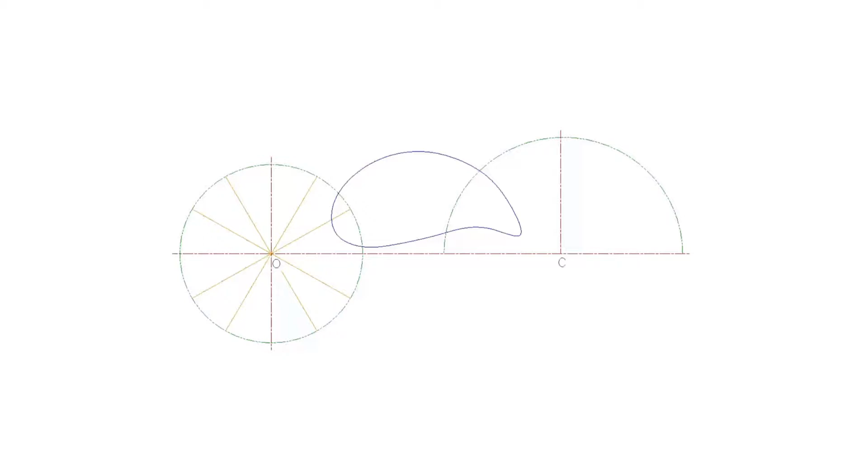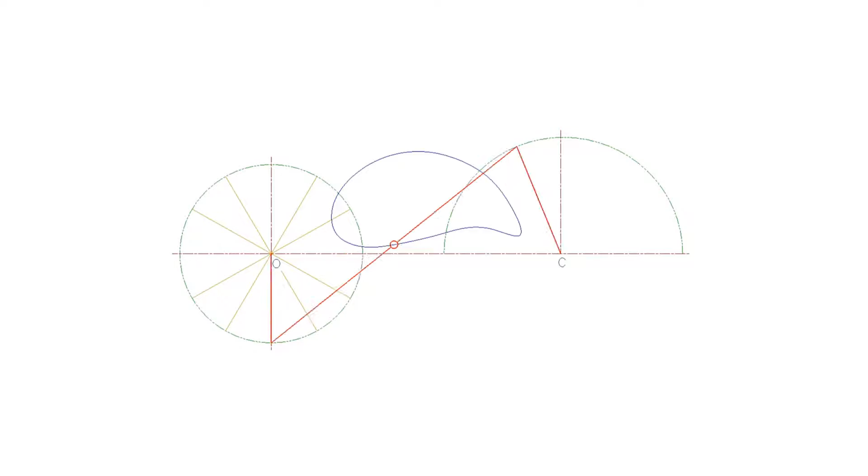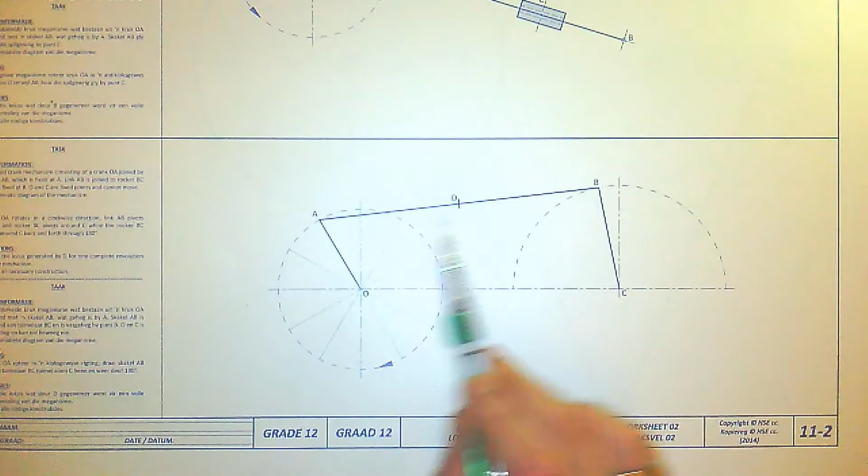For today's exercise, we're looking at a mechanism where we have 3 line segments. You can clearly see here the line segment O, which is also the center of the imaginary circle, and A, so that is the crank arm that's going to pull AB around. In the middle of AB we have point D, which is the loci that we have to determine. Then here we have point C, which is going to be the center for line segment CB, so CB is going to oscillate around point C as the center.

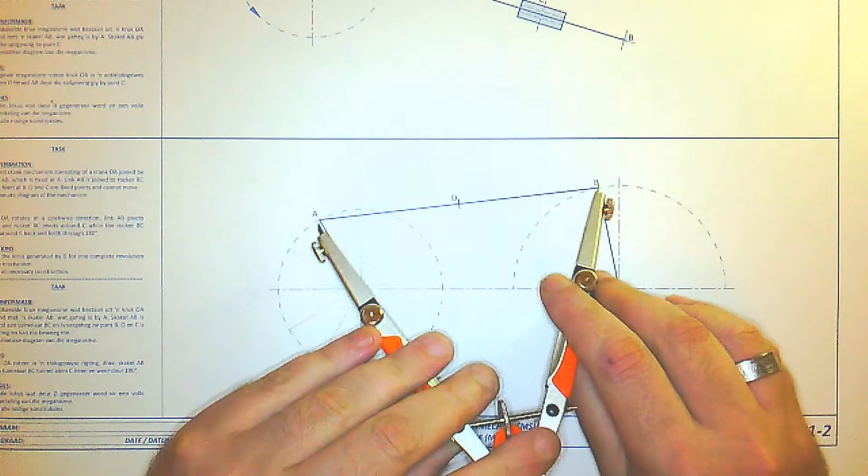It's actually a fairly easy mechanism to do. So to start, all we want to do is take our compass beforehand and set it to AB, because that arm cannot change its length. At the same time I'm also going to take line DB and set my compass at that distance as well. Of course you can measure it, but compasses make it much quicker.

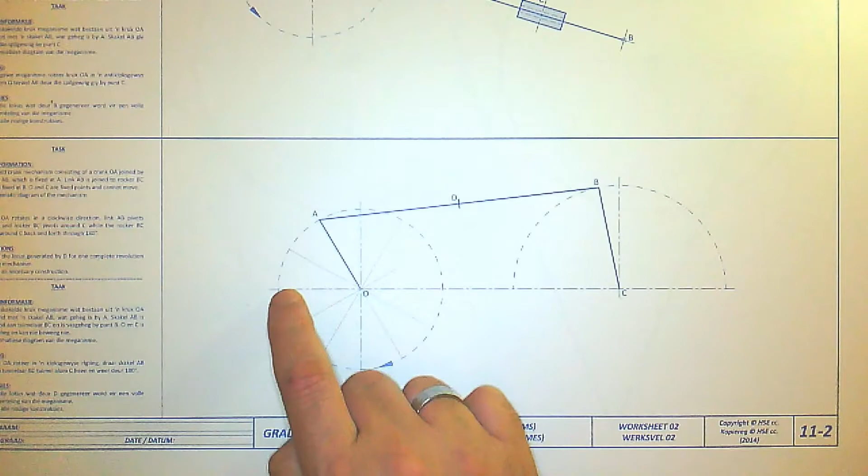Since AB cannot change its length, it's going to turn clockwise around, so we're going to go from A1 to A2, A3, A4 and so on. The first thing you want to do is divide your circle into segments.

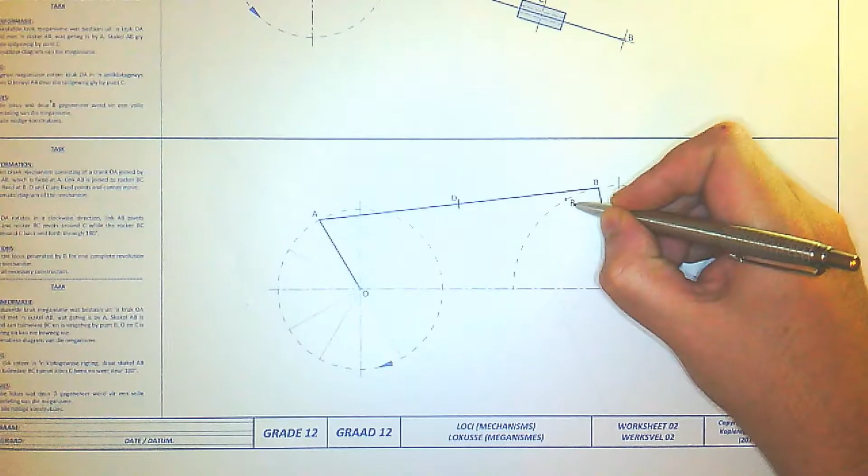So now step 1, you're going to take your compass and mark it there on the arc, and then mark that point. This point here would be B2. So B2 has to go to A2. This point would be A2 here.

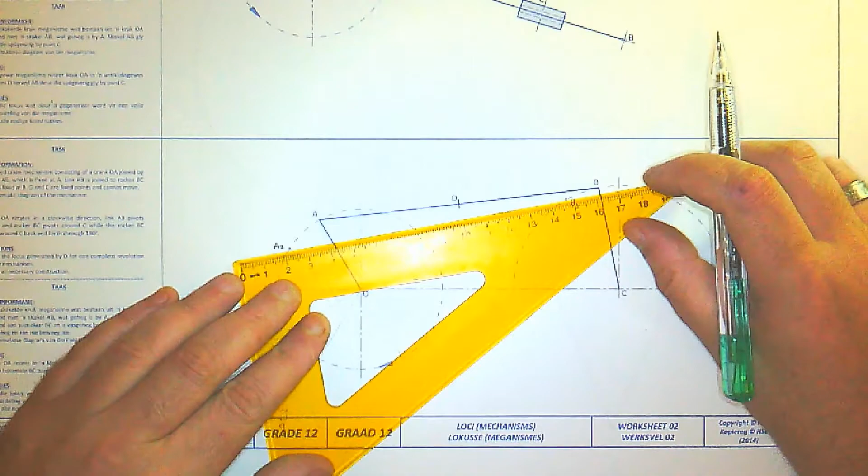So then I'm going to take my pencil and my set square, and I'm simply going to connect A2 to B2. You can see, so from B2 all the way through to A2.

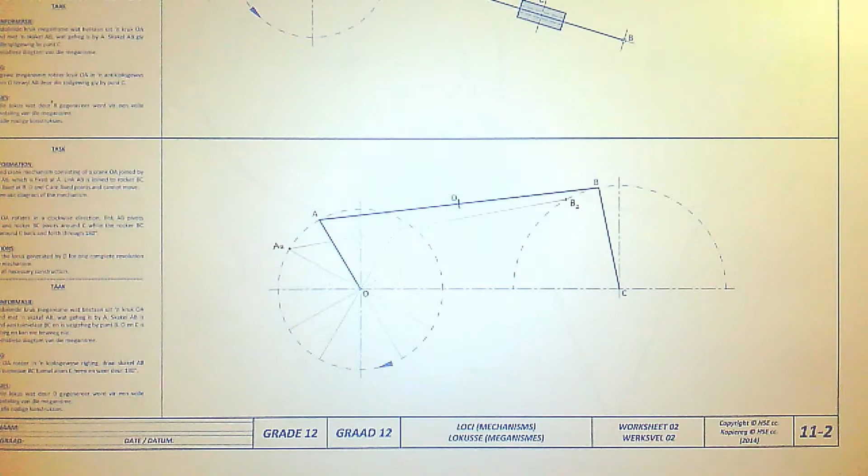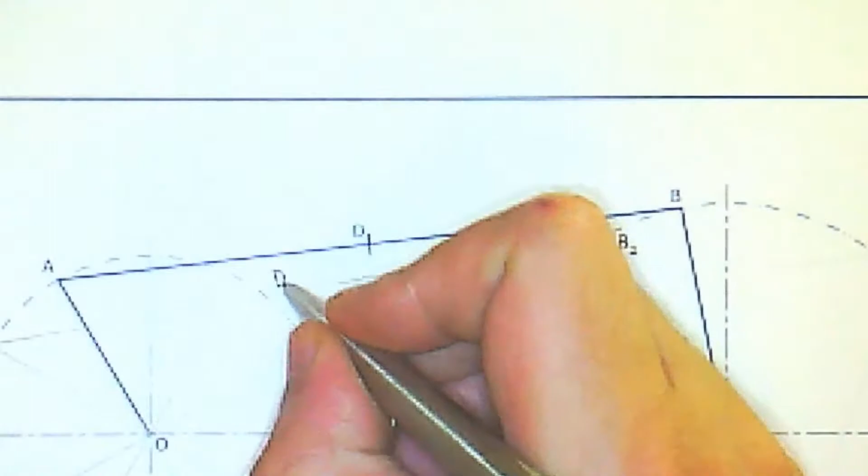Then we know the distance from A2 to B2; we also have the loci point that we have to determine. So I'm going back to my first arm, BD. I'm going to take BD from there, then go to B2 and mark down D2. I'm marking D2 on the new construction line, and then I can go and mark the point. So this would in effect be D2. There it is, D2.

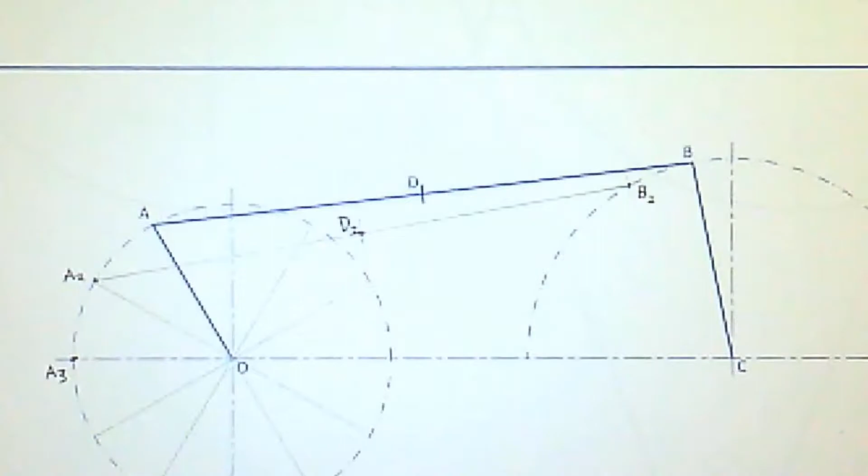To carry on, we're going to go to point A3, which is here. There's point A3, I'm going to mark it A3. Then I'm going to take my compass again - as a reminder, that's the distance from A to B. So I set it on A3 and mark it on the arc, and then I mark B3.

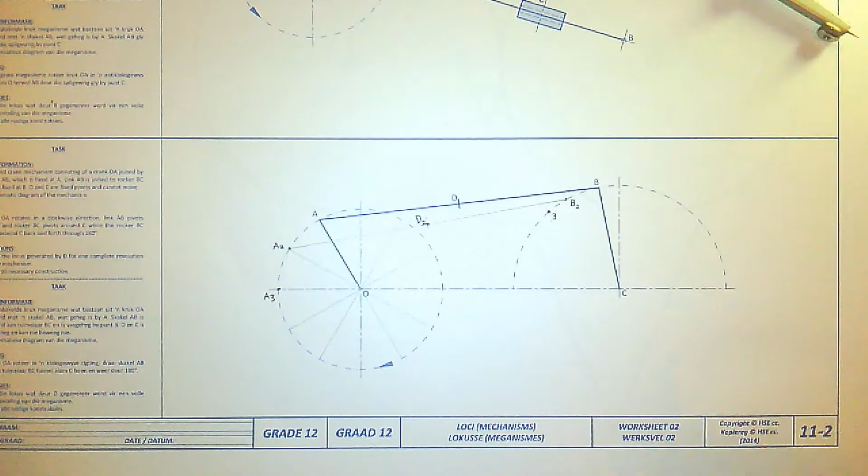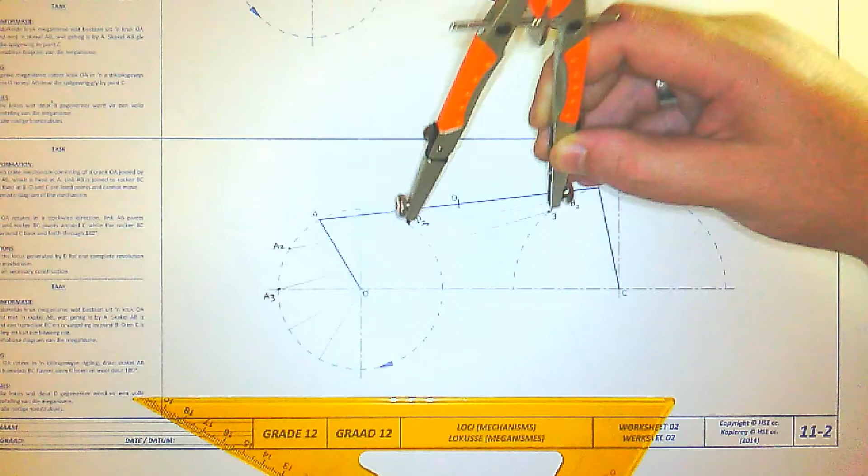Then I take my set square and connect the 2 points with a construction line, and then I take my compass again and mark D3 - as a reminder, from B to D is the same as from B2 to D2, which should be the same as B3 to D3. So I mark it there on the construction, and then mark it there on the line, and that of course would be D3.

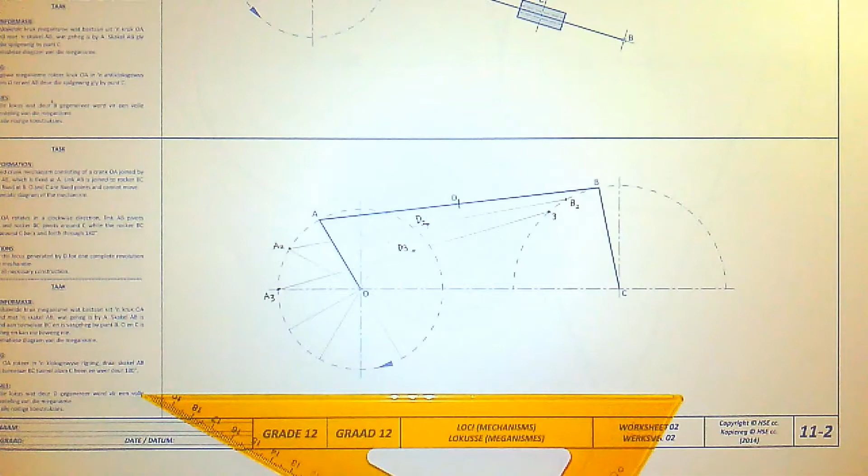So now you just follow the same steps for all the other points going round the circle, and then you should be done in a jiffy.

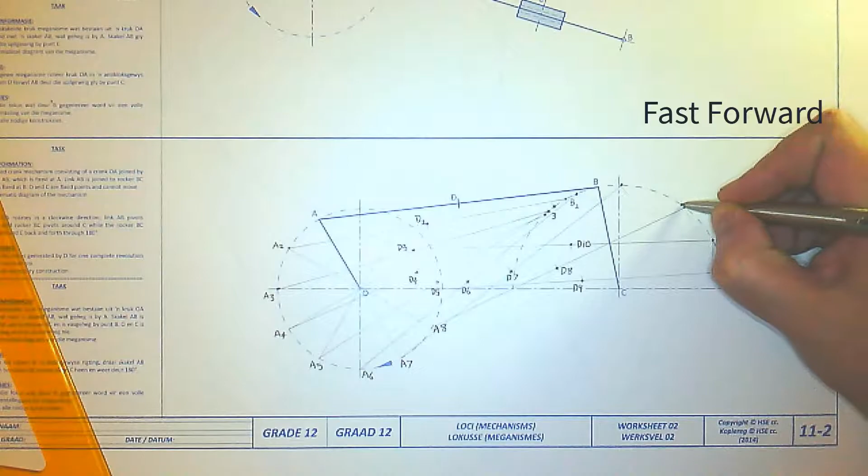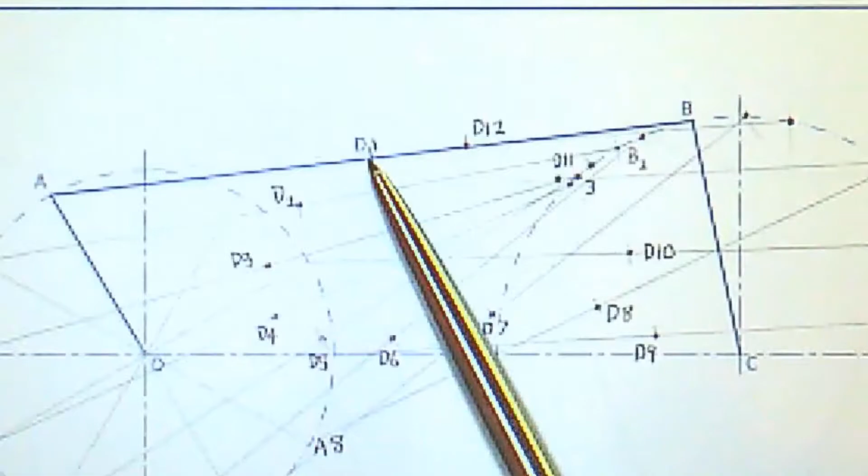Right, so now you can see here, there goes D1, D2, D3, all the way around. Then it makes a strange bend, and it goes round to D11, D12, back to 1. So now all you need to do is plot the point with the French curve or flexi curve, and you are all done.